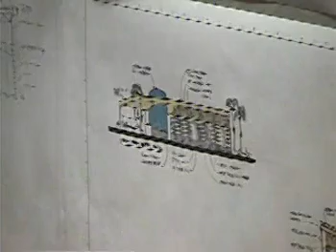At the Design Review Committee meeting yesterday afternoon, the committee looked at the earlier approvals and some updated information that was to be provided, settling in on the final details. As you may remember, there are different colors and materials proposed in this area and this area. The Design Review Committee recommended that the roof be provided in a tone called the Abigail, which is the yellow.

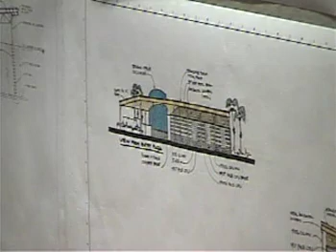So it's a little darker, a little richer than appears here. They've also recommended a dark blue stucco for the tower and office. In terms of the poles and their location, these poles are designed to be 10-inch iron painted black. The light fixtures would match in a similar fashion and similar volume of pole, not the same width, but it would recall the poles of the main building.

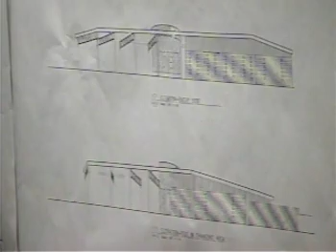Lastly, the canopies over the shade structure of the bowls and pool area would be a desert tan, essentially this color here. The Design Review Committee looked at this project for a while, and they seem to be pretty pleased in terms of how it's evolved and where it is at this point. With that stated, we'll recommend that you adopt the motion of approval in your motions agenda.

Thank you. Thank you, Alex. Are there any members of the audience that would like to address the commission on this matter? If you care to do so, this would be an appropriate time. Seeing none, back to the commission for comments.

Alex, a question. When I sat in on the prior design review discussion there was an in-depth discussion about the double tubular supports for the shade structures. Did they ever, Ralph had a good argument, Ralph Rea, was that settled finally? Because it seemed like they were nitpicking quite a bit on that design.

Yes, that issue was addressed yesterday, and there was some discussion whether the light poles should match the size and strength of the poles that uphold the roof, which are the 10-inch diameter. It was agreed upon that they should be the dual poles, but rotated 90 degrees so that they would line up with the bowls.

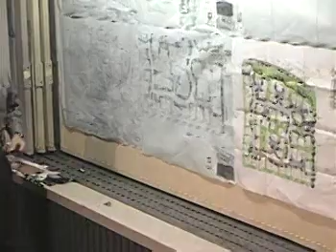As you may recall, this project is located on the southwest corner of East Palm Canyon and Araby. The final plan development district includes grading plans, landscape plans, wall plans, and architectural elevations.

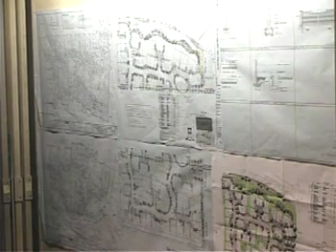I'll walk you through some of the base assumptions. There was concern on the part of staff regarding the pad elevations of the proposed development in relationship to the existing development to the south. We have pad heights directly to the west at 410, and to the southwest at 410 and 409. We wanted to make sure all proposed residential units would be complementary and not overwhelm or provide too much mass adjacent to the existing residences.

In this area, we've got pad heights at 406, 407, 407, and 408, clearly below the development to the west. The finished floor here is 409 in the existing development, with proposed ranging from 408 to 405. In this other area, the existing building has a finished floor elevation of 407 feet, with pads proposed at 405 to 404. So clearly, all of the proposed pad and finished floor elevations are below what exists in the adjacent vicinity.

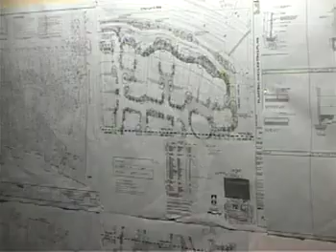In terms of the landscape plan, what's proposed at this time is consistent with the earlier approval. Condition 28 of the original approval said the intersection area should be beefed up in terms of planting, to provide shielding and cut the glare of headlights from vehicles turning from Palm Canyon Drive onto Araby. The applicant's design team added additional Thevetia, a yellow oleander, in a 24-inch box size -- essentially a tree size, not a shrub size. We're pretty comfortable they've done what it's going to take to improve that area and reduce the glare of headlights.

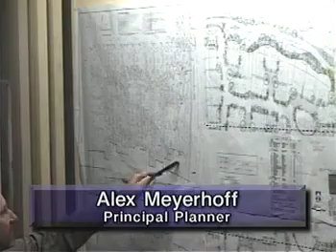Regarding the proposed wall and fences: the wall runs along East Palm Canyon Drive, ranging from 6 to 7 feet in height, which we think is appropriate due to the volume of vehicles and noise on that corridor. As originally proposed, the wall tucked into this house, leaving an open area before coming back out. We worked with the design team to redesign that wall so it wraps around the entire area and doesn't create a dead space or hiding space. We think that's a better design solution.

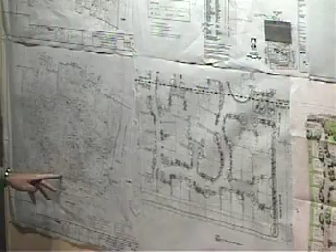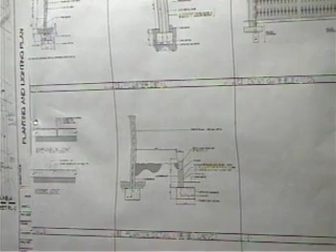Along Araby, there's a narrower planting area than on East Palm Canyon Drive, so the design team came up with mini planters in a repeating pattern that provides a sense of rhythm. The wall section includes a 6-foot perimeter wall with a planter area about 2 feet high, allowing small trees to be planted there, breaking up the rhythm of this long, expansive wall -- a nice design touch that softens it. Any questions on the landscape or grading plans before I move on to the architectural elevations?

Any questions of staff? Please proceed, Alex. Okay, thank you.

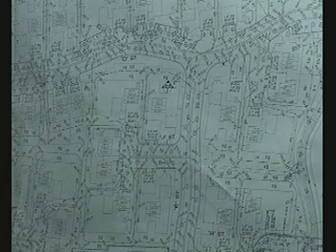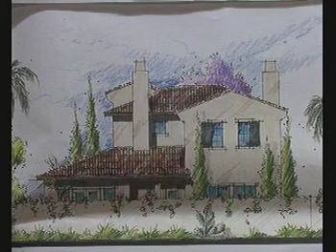As you'll recall, the design team provided some pretty colorful elevations of East Palm Canyon Drive, the Araby Drive elevations, and then the interior street elevations. There was concern at the time that this application came forward that the architecture may have been essentially one-sided architecture rather than architecture wrapping around all 4 sides of the building.

In reviewing this, we shared that concern. The applicant was able to redesign the elevations, but we're still at the point where we thought Plan 1 was kind of weak. Design review worked with us and agreed to that. So we have a condition or recommendation in your motion that we approve the final plan development district with design review restudying Plan 1.

Essentially, each of the 3 models has 3 sets of elevations, and the design review committee thought that because of the large mass of this building, it's essentially 2 units put together, this is what you'd see above the fence. There was some concern that this elevation might not have enough architectural detail or might not be rich enough to really place on our major corridor. So the applicant was comfortable with that.

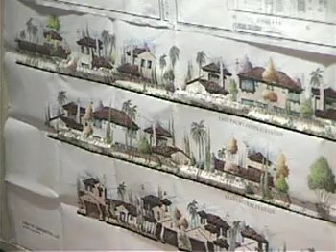We're recommending approval of the final plan development district with Plan 1 being restudied by the design review committee and their recommendation being final. So with the recommendation we have, you would not see the revisions to this design. The applicant was comfortable with that, and design review was also comfortable with that. That concludes staff's presentation. We'll be happy to answer any questions you may have.

Thank you. Mr. Caffrey, comment? And that's okay with the way our design review is structured to be final with them? It certainly is, yes. Thank you.

I can just report back that I represented the commission at the design review meeting yesterday, and we had extensive discussions on this issue, and it wasn't just the exposure of the rear of the number 1 models on the Palm Canyon corridor, but it's at other stages in the development as well, facing the neighboring property owner and even interior. So it's wherever it occurs during the structure. Design review felt pretty comfortable that the other models had been modified in a satisfactory manner.

So is anybody here representing, or is there anybody in the audience who would like to address the commission on this issue? If you would like to, this would be an appropriate time, please come forward. Okay, back to the commission for further questions, comments?

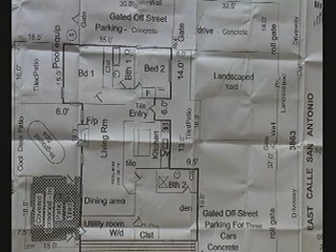There are 3 areas of concern or requests being made to you today. First, to allow the conversion of the garage and elimination of the covered parking requirement. Second, the covered workshop and tandem parking area here, which is 37 feet long and 9 feet wide. And then the covered screened-in patio.

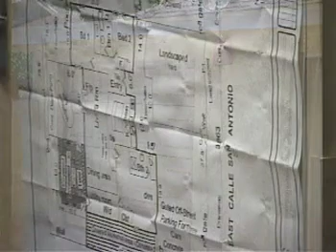In looking at precedents in the area and under similar zoning criteria, we're able to find precedents for this and this, but we weren't able to find the zero lot line configurations being requested by the applicant.

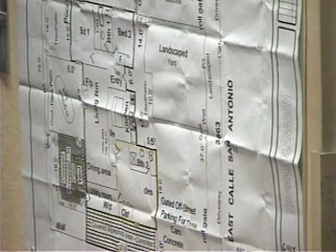In order to provide a structure on the property line, there are construction criteria that require a fire-rated structure, and also some structural work done. As it is now, the carport, covered car parking in this area, essentially rests on the existing block wall here. So we do have some concern about the structural integrity of that roof connection and its support on the wall.

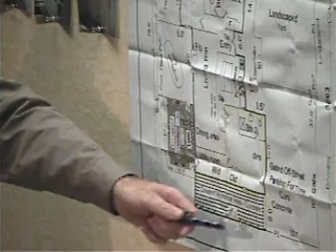Our recommendation is to allow a portion of the workshop area to remain with a 3-foot side yard setback right in here. This concludes staff's presentation. We'll answer any questions you may have, and the applicant is also available and would like to answer questions. The applicant did provide a number of letters in your packet in support of their request, and we haven't received any correspondence or walk-ins that have opposed this or provided any additional feedback in regards to this request.

Thank you, Alex. Any questions of staff before we open the public hearing? Ms. Morantz? I had one, that element that you said may or may not be structurally sound. How long has that been there? Since 1966 is my understanding. It's still there.

I'm not a structural engineer, but there are some concerns in terms of the fence. What it is basically is a shed roof structure that has a support all along the east side of the property that sets right on top of a garden wall. The garden wall was not designed to be an exterior wall of a building. There's just no way you could issue a permit with a garden wall as the support structure for a structure like that. And there are some places where the garden wall has cracks. I don't think there's any imminent danger, but it would be very difficult to bring that into compliance with building code requirements without probably either rebuilding the wall or building a complete support structure independent of the wall.

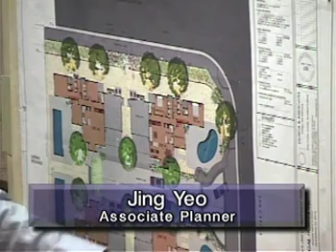The perimeter wall is proposed at 7 feet per staff recommendation along Indian Canyon Drive for noise attenuation purposes, along 6 feet high along the north property line, the west property line, and then dropping down to 5 feet on the south property line due to the pool fencing requirements.

Access to the development is off a gated entry on San Carlos Road into a common driveway court 24 feet wide. The existing parcel is substandard, so staff does support the planned development district modification for reduced lot area.

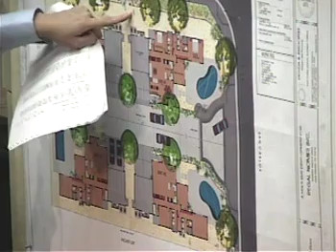The applicant is also proposing reduced setbacks: 18 feet on Indian Canyon Drive, 10 feet in the rear, 8 feet on the west, and I believe it's 20 feet on the south side of the property.

In terms of off-site improvements, it's being recommended there are full street improvements along San Carlos and Indian Canyon Drive, including a combined 10-foot wide bicycle sidewalk path per the general plan. It should be noted, our general plan actually states it should be 12 feet wide, but according to our master plan of bikeways, we've been telling the applicant 10 feet wide, so we felt it was unfair to change that at the last moment.

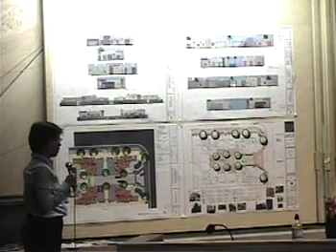The project is compatible in terms of mass and scale with the surrounding neighborhood. There's a single-family residence to the north and to the south, and there's also some apartments to the east.

Design review saw this on, it was October the 21st, and this project had actually been to design review about, I believe it was 3 times in the pre-application stage.

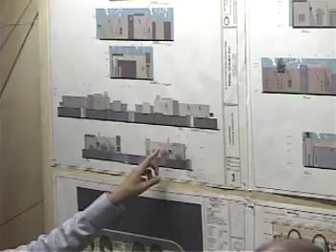So design review responded very well to the project, and they just had some minor comments regarding the solar screens above here. They commented those should maybe be elongated or extended to provide more solar protection, and some concerns regarding the scuppers here. However, we have a condition of approval where there should be a final detail, a final blown-up detail for approval in the final development plans.

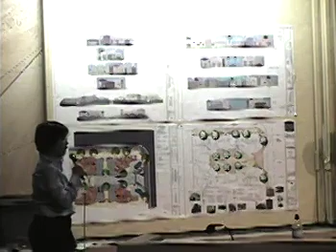And they also did support the increased wall height along Indian Canyon Drive, agreeing that it was required for noise attenuation purposes. That concludes staff's presentation. Staff and the applicant are available for your questions. Thank you.

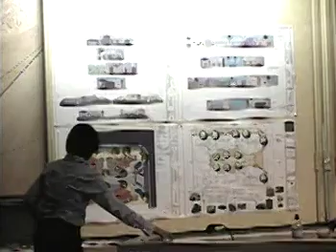Any questions for staff before we open the public hearing? Mr. Chairman? Yes, Mr. Caffrey? Could you point out the property lines, the new property lines? Sorry, can you say that again? Well, it's being divided into 4 lots. Oh, okay. Let me get another exhibit for you, actually.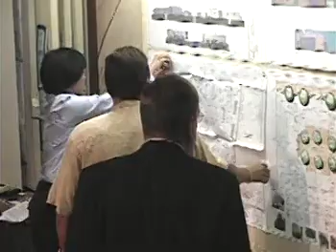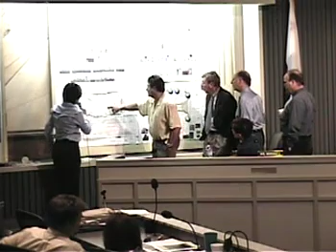So you can see in this exhibit, it would be lot number 1. It would be, yeah, the dark lines there. One. Right, that's the common driveway area, right. So 1, 2, 3, and 4. That is maintained by the homeowners association.

Can you, I don't have a microphone. Just point out again the parking and the car movements to get into the parking and out and so on? The car movements, well, actually shows it better on this one.

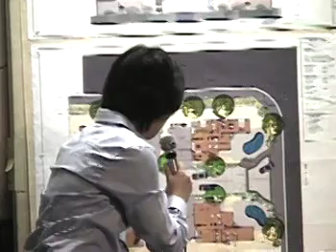The parking is proposed in 4 two-car garages. These are intended to be basically almost like single-family homes. They're all 4 individual lots, so there's 1 two-car garage for each unit, and the maneuvering room is in this 24-foot driveway area, which basically meets code.

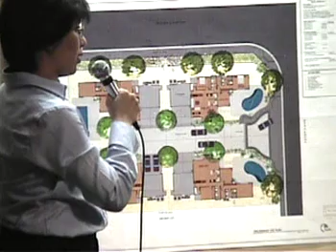So the guest parking would be, there's enough room there for a car to park in front of the garage, so to. Correct. There's 19 feet 6 inches for a guest parking spot in front of the garage doors.

Jane, I have kind of a follow-up to Mr. Caffrey's questions. The application is for a division into 4 lots, but it's into 4 lots and a common lot as well? That's correct. And the exterior landscape portion facing Indian is part of a common lot, or is that part of one of the individually owned lots? That's supposed to be commonly maintained as well. I'm sorry? The landscaped areas outside the walls are meant to be commonly maintained as well.

Any further questions? If not, then we'll open the public hearing. Anybody wishing to address the commission on this matter may come forward at this time. Please give us your name and sign the clipboard before you leave.

It's not contiguous unless maybe it flows in. It's hard to tell. Good afternoon, Mr.

Good afternoon, Mr. Chairman, committee members. My name is Juan Carlos Ochoa. I am the architect for this project. My office is located at 73626 Highway 111 in Palm Desert.

The only reason I wanted to come up is to clarify the perimeter wall that faces Indian Avenue. A noise study report prepared recently recommends a 6-foot high wall. We'd like to maintain that 6-foot height because along that wall we have several indentations, and in those indentations we'll have a slightly higher wall as accents, so we're breaking up the wall rather than having it be continuous. The staff report recommended 7 feet, but we feel 6 feet is more appropriate aesthetically, and it's also the recommendation of the noise study.

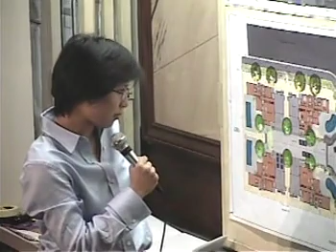Are you talking about these trees here? Just where is the wall, and what is the landscaping that would be on the street side of it? Okay, the wall here, as you can see on the landscape plan, is this tan-colored line, and it's got some play in it, some depth, some room for that tree well.

This tree here looks like a Chilean mesquite, 24-inch box. Just trees and shrubs. These are trees - that round one is a tree, right? And these are intended to be shrubs here.

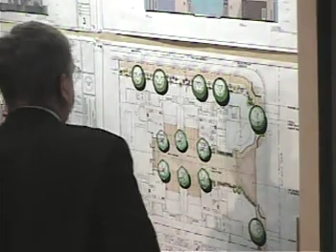And Jean, the trees are on the exterior portion of the wall? That's correct. And is that going to be part of the homeowners association's responsibility to maintain? That's right.

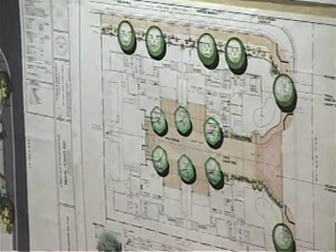And what we're basically doing here is taking 2 lots and turning it into 4 lots. That's correct.

Perhaps you could address the issue of zoning - one of the members of the public questioned the density and the appropriate use. What's the appropriate density allowed in this particular zone? The subject property is zoned RGA 6, but as you can see in the staff report, it's designated L6 in the general plan, which is 4 to 6 units per acre. Through staff's analysis, it was found that this density of 4 units on a little over half an acre is compatible with the general plan designation of L6.

All right, and the reason you've recommended, and the applicant has used, a planned development district is because of what would be substandard lot sizes if these were single-family homes, is that correct? That's correct. Any further questions?

Mr. Schoenberger? I think this is a nice project, and I can understand the comment regarding the density. I guess that is a bit of a concern, although I think this project is within the zoning restrictions in that area. The other concern I have is, again, with the wall and the gate. I think the wall on Indian is appropriate because of the traffic and noise, but I don't see the need, or I'm having trouble with the need for a gate. Rather than try to isolate these projects from their neighbors, I think we ought to try to integrate these projects with the neighbors.

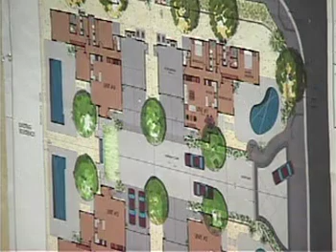In this case, we've got 4 units that are basically facing inward in relation to their neighbors, and then we have walls around all sides, and I suppose a gate that will be opened or closed with some kind of whatever devices, and that's my problem. I just don't like to see us approve projects that are isolated from their neighbors rather than integrated with them.

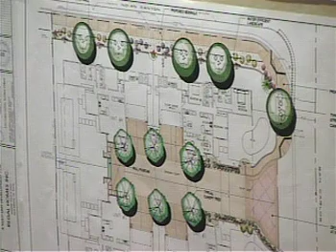I don't know here, given the way these 4 units are situated in relation to each other, that it can be avoided entirely without redoing the whole site plan. But I would not like to see this be a 4-unit gated community in the middle of an area that we're trying to see developed and become more of an integrated community, as opposed to a group of separate walled, gated type developments.

Ms. Morantz, you had a comment? I agree with Jerry on that item, and I'm ready for a motion unless there's further discussion.

I had a follow-up question. Perhaps staff could comment on the gate issue, but also on the 7-foot wall recommended along Indian Canyon. I noticed in the report it's recommended to be a foot higher for noise reduction purposes, but the applicant raised the issue. If we could just adjust the wording very briefly, instead of reading as if it's a required 7-foot wall, say up to 7 foot.

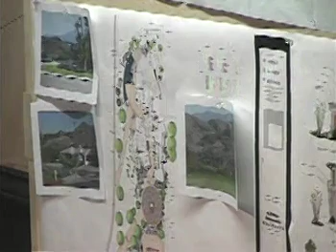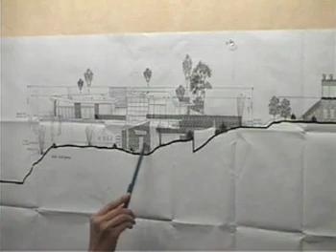This is an application by Bruce McKenzie and Keith Markowski for essentially a 7,200 square foot addition to an existing residence located at 2288 South Ridge Drive. If you look at this site section, which goes north to south, the existing residence is this particular parcel, and there's an existing tennis court with that gazebo structure up there. The addition they're planning on adding is approximately this area, shown in the site plan. The actual public hearing application before you is a variance for a building height of 33 feet.

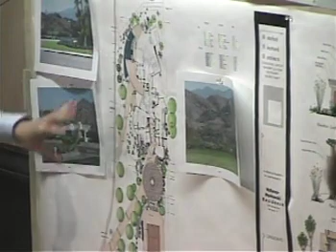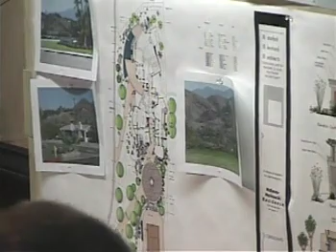To understand the topography of the property, I'm passing around some photographs. The building pad, as it stands right now, is actually on 3 different pads: an upper pad, a central pad, and a lower pad. The pads range from about 24 to 33 feet above the top of curb, which is the standard for measuring building height. For properties greater than 30,000 square feet, building height is measured from adjacent natural grade, so in this case staff used natural grade. As you can see in the section, from natural grade to the top of the roof is about 32 feet 9 inches, so approximately 33 feet. The intent was to keep the addition on the same level as the existing residence instead of sloping it down.

Staff asked the applicant to submit building height exhibits, shown in these three photos, essentially photo simulations of what the residence would look like from the east, from the west, and from the north, which is this one right here.

When this went to design review, it went about 2 or 3 times. They did not agree with the building height of 33 feet. The recommendation was to maybe use ramps or slope down the addition to about 30 feet. Therefore, staff is recommending denial of the variance application for the building height of 33 feet.

Understanding that the Southridge area has extreme topography, other homes in the neighborhood have not been granted any special privilege for additional building height, and they do blend in quite well. The existing residence is actually behind a ridgeline right now, so the addition is actually going to be sticking out behind that ridgeline, making it seem more out of scale.

I know the applicant is also available for your questions, and so is staff. That concludes our report. Thank you very much.

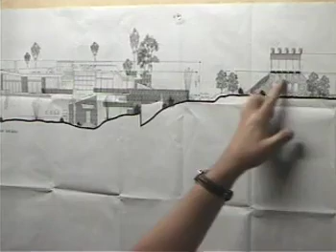The only alternative in doing this is to do away with this and basically move the tennis court down to this level, then put up a 30-foot structure that would go all the way here. That really is not what we want, and I don't think anyone really wants a 30-foot structure up on top of the knoll anyway. So that's the worse of the alternatives and wouldn't really serve anyone.

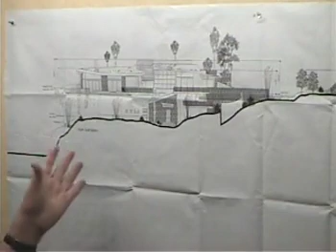But for reasons of my mother, who is advanced in age, I'm trying to keep it all on one level. And this is really the only way to do it.

From the distance, being back on Highway 111, looking up at the property, 3 feet is just so minimal, I don't think anyone would really notice it.

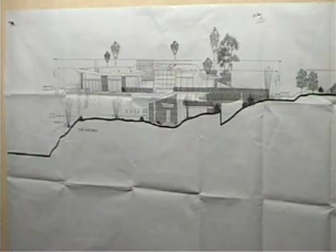Again, I just want to point out that I'm not trying to make the structure bigger or taller than it should be. The reason is to try to keep it all on one level without having to go back and build the structure back on this property.